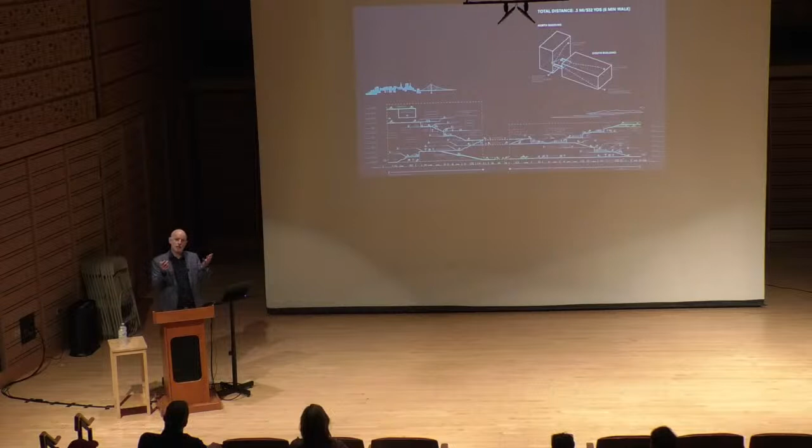But it's what they experienced there that really holds true. And so this is an example. This is the headquarters that we just recently completed in Mission Bay, San Francisco for Uber. And one of the ideas here was, how could we bring the energy of the sidewalk up into the building? So yes, you could take the elevator, but could we connect all the floors through this sort of shared commons, almost taking like the commons we have in front of us, in front of Old West, and turning it vertically and connecting all the different floors together. And we call it, this commons, we refer to it as sort of the front porch.

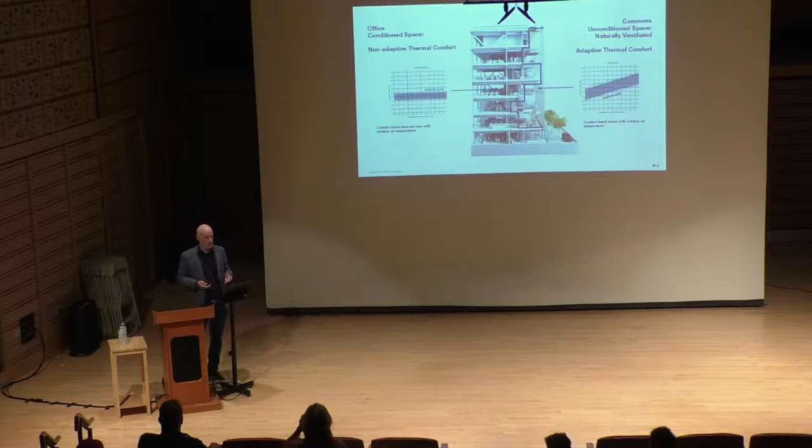But one of the key qualities of this building is the climate in San Francisco is so temperate. So for more than 3/4 of the year, you can open your windows and let the outside in. So we decided, why don't we turn that commons, that vertical pedestrian space, into a space that could open up to the surrounding community. And so we did a lot of analysis to understand how we would mitigate the heat that would build up through that space during the day.

And what we did was we created a breathing facade. So quite literally in the morning when you see the building, it looks like a clean glass ice cube. And then as the day goes on, the building starts to transform as the facade starts to open up and naturally ventilate the vertical commons.

The other thing that was really important about this project, again, was how do we scale to people and bringing in warm materials like wood and terracotta to really create this sense of a scaled, intimate connection. And how those materials are read on the outside of the building as well. So it's not just the people who work there, the engineers who work there, but people even on the street can look through this almost glass-bottom boat right into the vertical commons of the building.

And so we've taken this idea of what we call the mid-door space and now have applied it to a new headquarters we're doing for Atlassian in Sydney, Australia, where quite literally the whole building opens up to the outside. But what we've done here is we've created a series of 8 villages made out of a hybrid system of mass timber and steel. The steel is the bones that really hold the building up. And then at every tray, there's a 3-story mass timber village. And so really looking at how we can bring these natural warm materials into the work environment, and then quite literally just, sort of stepping it to the sky.

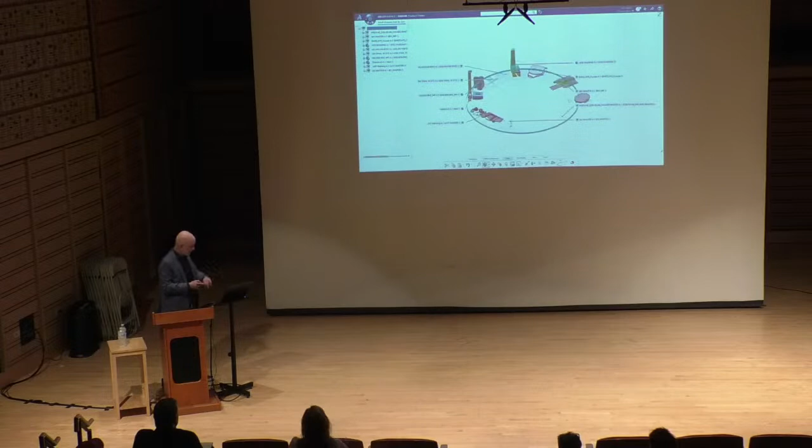So this whole idea of model-based delivery—I think this is one of the key things, because our work should not be about projects, it should be about products. The idea is that as something evolves over time and you build that building, data from that building, feedback from that building, which we call the digital triplet, feeds back into the digital twin, and that informs your next project. So you're really building off of experiences and knowledge and data, and it's an iterative process.

This is something that we're not seeing right now in our space because, typically, the model doesn't go beyond.

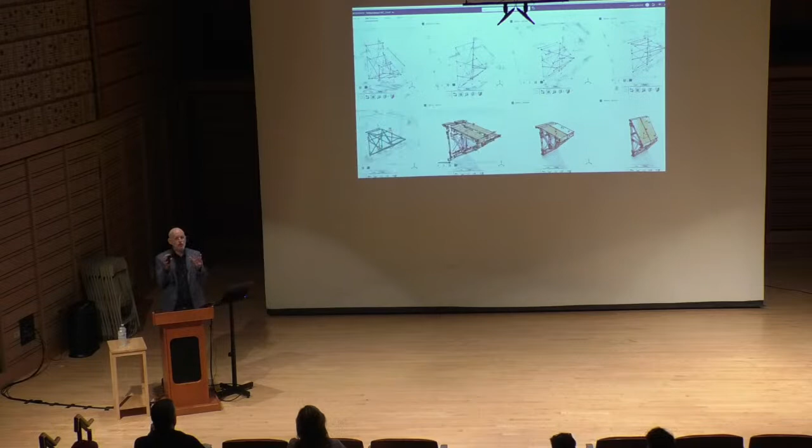If you're lucky, it goes into construction, but it typically doesn't go on to post-occupancy, so you're not getting a lot of that feedback. But here, it's the wireframe that's critical. That's where all the attributes of the materials are embedded into the model. So if I move one of those cords, it automatically updates the geometry of the materials, and it also updates the material frames next to it.

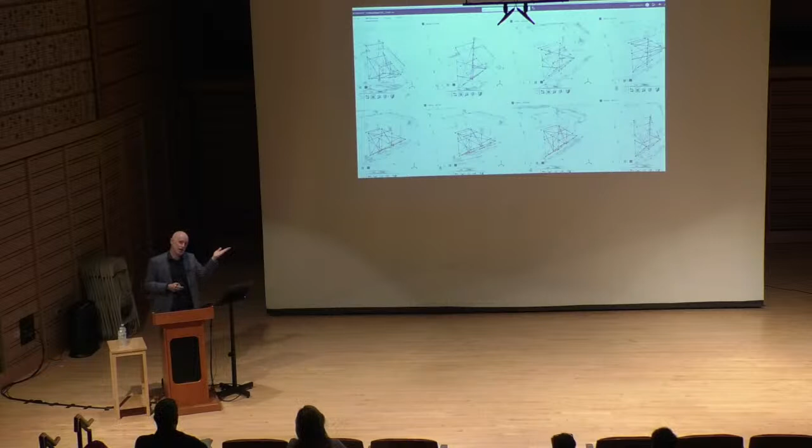That's the kind of thing - when we did the camera obscura, we actually had to go in and manually change things. But now with parametrics, we're able to do that.

And because the power of computing has come so far, we can now put all this information on our phones. I could show you later on if you're interested, but I have the whole digital twin of the Barclays Center on my iPhone.

And it's that kind of power where you can go into a meeting and pull something up. What would be great is if somebody goes to a concert there and wants to know where the best fish tacos are, they can call it up and start looking, or where their seat is. So it has so many opportunities for this future of open architecture.

We created - my wife, who is a professor of environmental science at Yale, scratch built a fully immersive environment called Beam Lab. It's 360, her space has 12 projectors. Basically she could put you in a site all over the world, but she can also map data, overlay data, and start telling you what are some of the criteria, what are some of the performance requirements that might need to go into that building in order to work well in that condition.

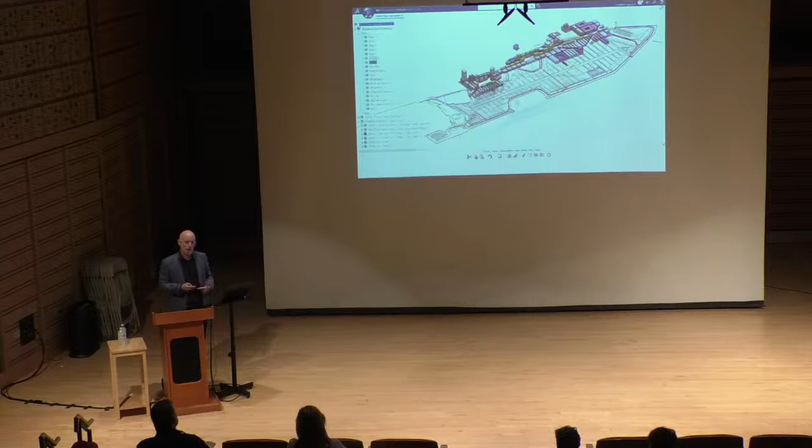And then you could make spreadsheets and really analyze it. This is really about virtually prototyping multiple times before you actually get into the actual design and construction of a project.

So really quickly, I'm going to go through this whole idea of how advanced manufacturing is the key to dealing with issues of the environment, housing, and creating a more resilient supply chain. When we were hired to do the Barclays Center, we started out with the facade. There's 12,000 panels on this building, and they're all different.

We didn't tell the fabricators who were bidding the job up front. We said, well, maybe there's a family of 10. Everybody said, okay, we can handle that. But as we started working with them and using the software to efficiently nest all the material and look for the optimum roll size of steel, we realized that as long as the panels were water jet, folded, and weathered chronologically, the computer didn't care if every panel was different.

So we created our own automated shop tickets and talked to the fabricator. This is important: architects aren't supposed to be involved in means and methods, but if we're really going to break down these barriers, we all have to work together and manage risk together in a collaborative way.

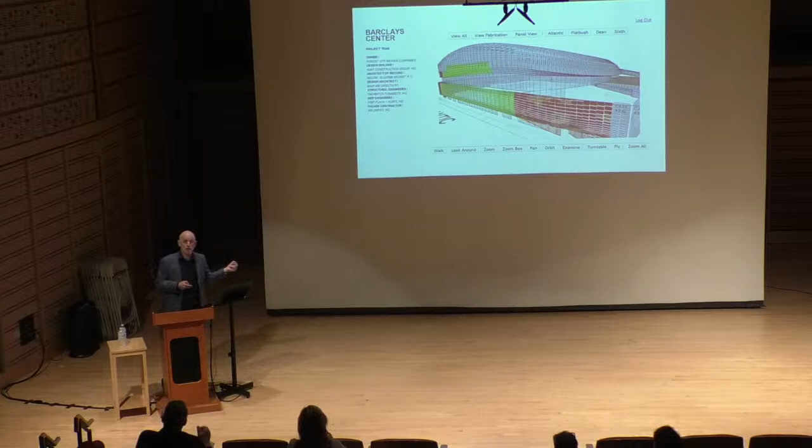We're able to monitor where those panels are, whether they're still in the factory being fabricated, being weathered, on the truck, or on the building, and we can see where there's a problem. And of course ownership goes, oh, I'll cut a check for this percent because I can actually see in the model where you are with the project.

This is the CATIA model we created for this project. So what was really exciting is saying, okay, we did this in the United States, but can you do this in South Africa? And so we won an innovation hub project in Botswana, Africa.

One of the reasons they hired us is they said we really want you to use this technology on our project, we want the tech transfer. So we met with a fabricator in Cape Town who won the bid, and one of our people, Rebecca Lorenz, went over there and spent two months helping them modernize their plant. Then we generated all the fab tickets. By this time, we could have everything on our phone.

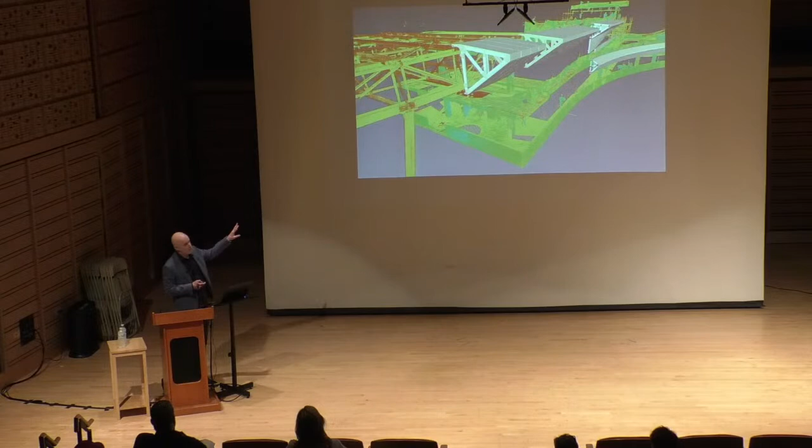We also did digitization, where you go in and digitize the existing condition to make sure all the steel hangers are in the right place. We learned this from Barclays when we found out 16% of the hanging clips for the steel panels were in the wrong place. So the iron workers went up there, cut them off, we showed them on our iPad where they needed to go, they put them in the right place, and every panel went up right the first time.

So you can imagine when those big mega panels showed up at the site and the clips weren't in the right place, you had to put them down on the street somewhere. And that's where everything starts to turn into a train wreck.

So we've just finished digitizing the whole USS Intrepid because they want to open the whole ship up to the public, but they can't cut bulkheads to meet ADA requirements and fire safety. So we're looking at this whole concept of a virtual museum, so you can actually move through the whole ship.

Here again, sort of like the camera obscura, the pieces were all cut, folded, broken, then boxed up and sent to the site, and put together in the parking garage underneath the building. Again, trying to create a safe work environment, but also using a lot of the techniques we developed from our previous projects on this project. And this facade was a tenth the price of the Barclays facade, but it was more complex.

So the opportunity of really looking at how we can work with global fabricators to advance this approach is something that we're all very, very excited about.

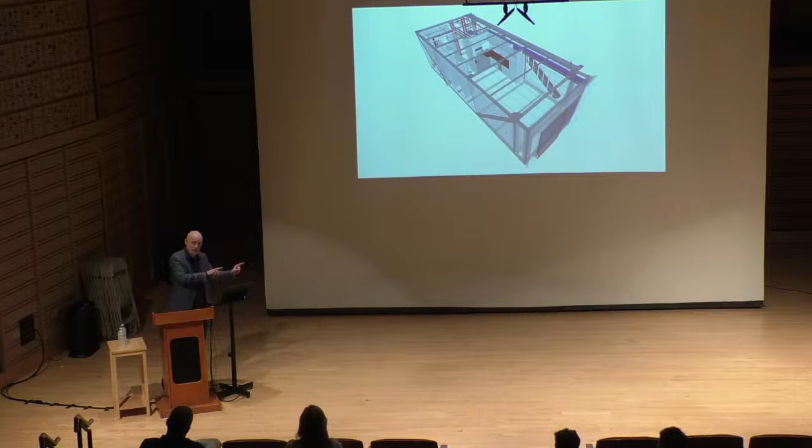And this is a Revit model. A Revit model, for example, is what typically architects work with, but you can't actually send files from this model to a fabricator. It's really a representational visualization device. The models I was showing you earlier use CATIA, Dassault Systèmes CATIA, where we can actually take information from our models and send it directly to the fabricator's machines.

So what we learned from this whole process was, as some of you involved in tech understand, if it works the first time, then you're not really doing anything new. There were so many problems with this project. We learned everything what not to do. And part of the problem was the general contractor hired to do this basically took the job site and moved it into the factory. So we weren't even manufacturing. We were just doing construction under a roof.

The other thing is there was a lot of material systems that you normally see on the job site. The same ones were being done here, like sheetrock, chipboard, drywall. That is not a material you see in factory production. You put up a wall and you put some tape, you put some spackle, you sand it, put some more spackle, sand it again, then you prime it, and that doesn't work when you're working in a manufacturing environment. It just slows everything down.

So you start to think about what are the kinds of material systems you need to use. From this whole process, it was great. It was a union job. It was made in Brooklyn. People got upskilling. It's a great story. But we realized this wasn't going to impact or address the needs of housing in our city.

But what was beautiful about it is it doesn't feel or look like a modular building. People could walk by and they wouldn't even know that there are 363 mods stacked 32 stories tall with a tuned mass damper, because this building's embodied carbon is much lower than a concrete building. So already we're addressing some of those challenges.

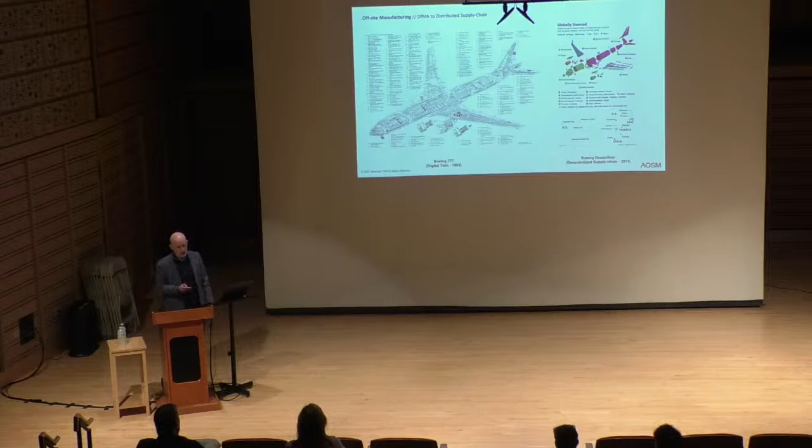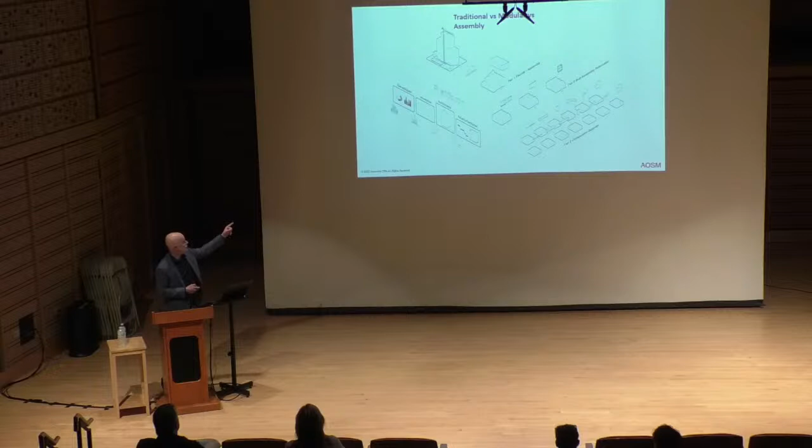So this is the traditional model you see. All the materials and everything is brought to the job site. This is what you see with aerospace and automotive, where you have a tiered supply system. And here, the key thing is when you do a high-rise building, you can't single source it. What that means is you can't rely on one supplier or one builder who's only able to do this kind of architecture, because if something goes wrong, you've got to be able to pivot. You've got all this money being financed, and you've got to be able to go to another supplier, another contractor to help support the mission. So it's an open source supply chain.

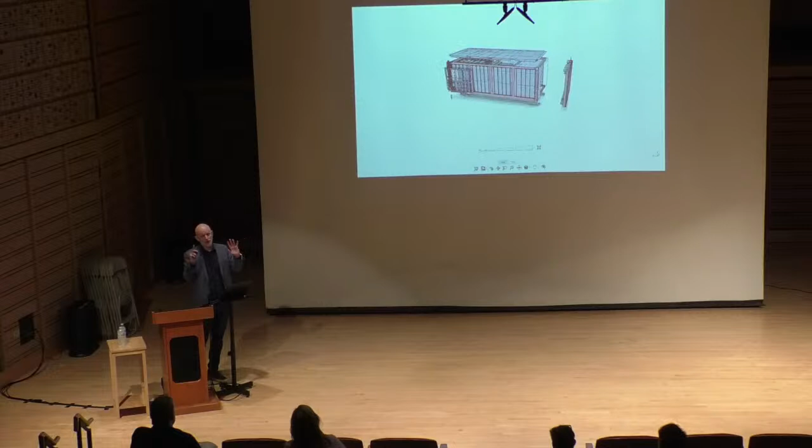So every component in the project is modeled in the computer. And what you see here, they don't all show up as just sealed boxes. This is a studio, just to give you an example — we also do 1 bedrooms, 2 bedrooms, and 3 bedrooms. But what you see here is this is the CATIA model, and all the components you need to manufacture this studio apartment is captured in this single source of product data. And it's all tracked through a platform.

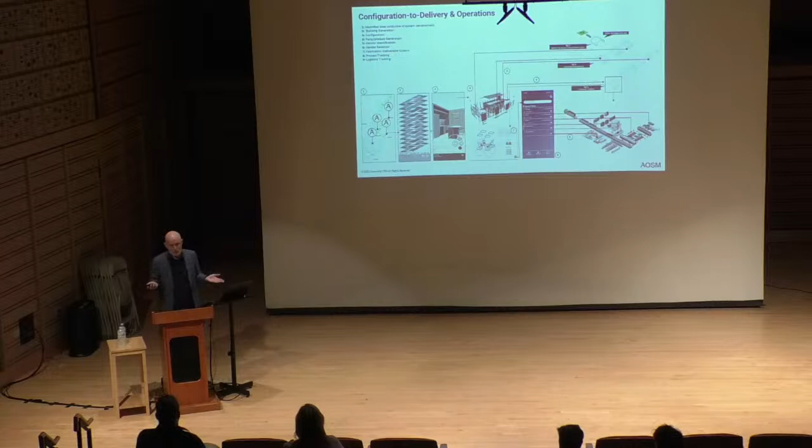As Elon Musk said, we're a tech company that happens to make cars. SHoP, in a way, is like a tech company that happens to do mid to high-rise residential buildings. So it's really looking at how the platform adapts and evolves over time and informs how we connect with our fabricators, how we connect with the bank. Everything from zoning to financing is done through this process. So the idea is you basically buy a building like you buy a car or an airplane, but there's a lot of data that backs up your decision making. It's sort of like when you order a car now, you say, well, I want this and I want this. So there's a lot of detail that goes into that.

This is one of our first projects we're working on in terms of the development deal for a mid-rise building in Harlem. So what we did last summer was we decided we're going to test our supply chain and do a 1 bedroom, because we have a prototyping facility in Harrison, New Jersey.

So here you see, again, the model broken apart. There you see the actual one bedroom. And what was really cool about this — nothing against builders — but we wanted to see if we could put it together ourselves. There was one licensed electrician, but our MEP engineers put all the piping and all the ductwork together. The steel was actually fabricated in Venice by Cimolai — really fantastic fabricators who did the Culture Shed and the Oculus in Lower Manhattan. The tolerances are 5 millimeters. We're not talking about inches or quarter inches here, really manufacturing tolerances. But what's really exciting is that you've got designers and engineers who are actually putting it together.

And here you see them connecting them together, and there's the facade. So when the module shows up at your job site, everything's inside, including your appliances. Your flooring's in, your appliances, your MEP systems, everything. The only thing that's not done is you have these mate line hookups — we'd bag them up, they'd go in your closet, and then you'd connect the pipes and do all the framing around the door thresholds. But here you get a quick view of what that space looks like.